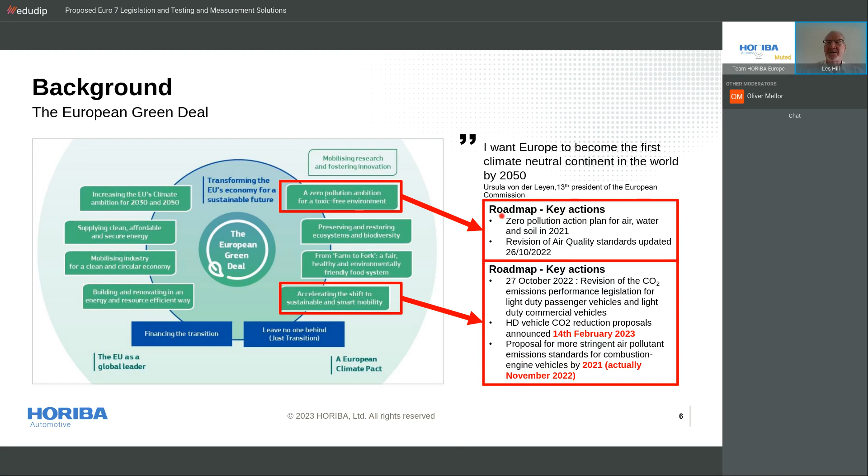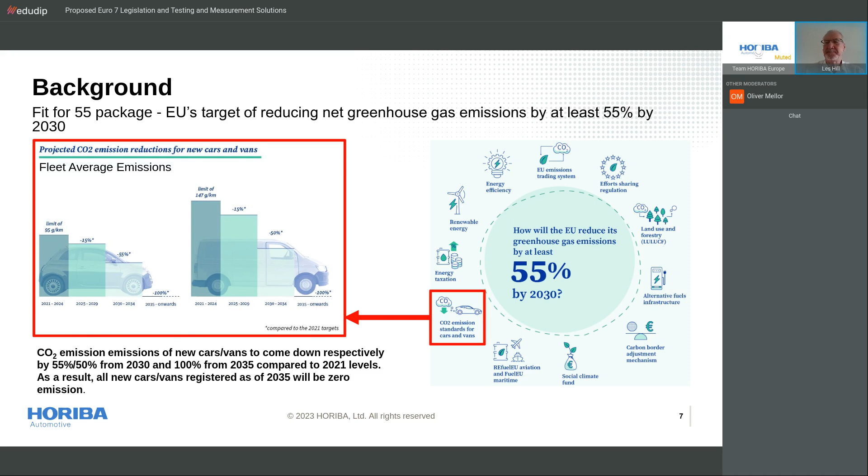The background: the Fit for 55 package will require that light-duty cars and vans must reduce their emissions by 55% and 50% respectively from 2030, and 100%, in other words, no combustion from 2035 in comparison to 2021 levels. That has now been approved by the EU Parliament on the 14th of February. It will now go to a final vote in plenary, and it will have to be endorsed by the Council. My understanding is that the vote from the Council, before it is published in the official journal, will take place on the 7th of March, but it is expected to go through.

These are the details of the heavy-duty CO2 reduction that was published in February. Basically, for heavy duty, all trucks above 5 tons, city buses and long distance buses above 7.5 tons, as well as trailers, have to meet a reduction of 45% against the 2019 levels by 1st of January 2030, 65% by 2035, and 90% from the 1st of January 2040 onwards.

New city buses will all have to be zero emissions as of 2030, but you can decide how you will meet that, because you could use electrification, hydrogen fuel cells, or hydrogen in internal combustion. There will be exemptions to the CO2 reduction targets for this list here of heavy-duty vehicles.

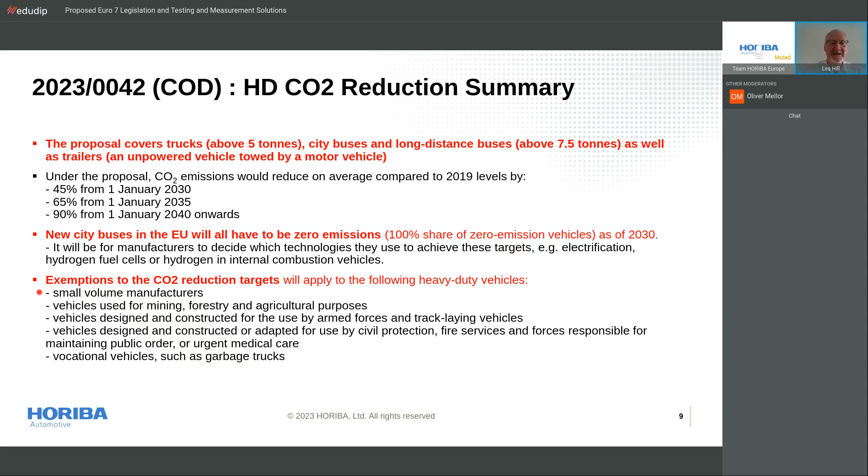Now, the Euro 7 standard is a bit of a revolution in terms of automotive regulation. For the first time, we have a coverall regulation that not only covers exhaust emissions and evaporative emissions, it also covers other areas of emissions in the car. So, for example, we now have limits for the emissions from brakes. They are proposing rules on the emissions from tires.

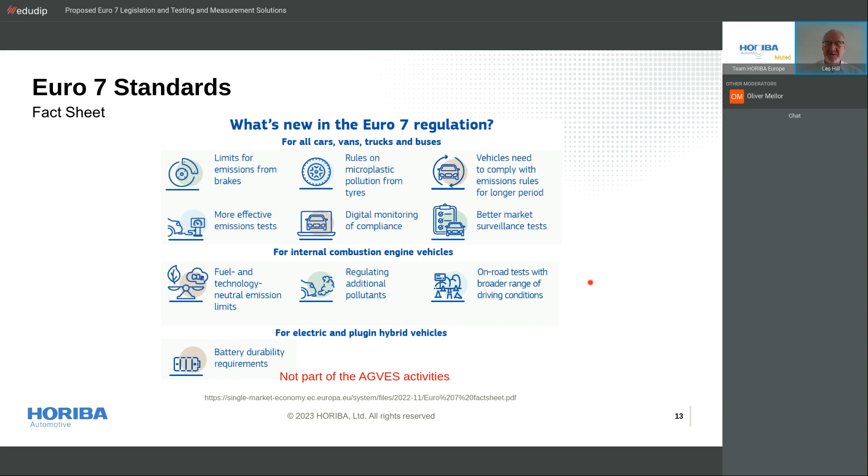And finally, Euro 7 also covers electric vehicles, specifying battery durability requirements, which was not part of the original AGVES, but was added to Euro 7 by the European Commission. The type of testing: as a result of the AGVES process, the favoured route for type approval will always be on-road testing. That is, you take your vehicle that you wish to be type approved and you drive it on the road. The portable emissions measurement system is mounted on.

And now the rules will cover almost all driving conditions in terms of dynamics, cold starts, warm starts, and a wider range of ambient temperatures and payloads. You are also expected to measure the new regulated pollutants if it's technically possible to do so.

Laboratory testing is still in the type approval, but this is mainly for using the WLTP for CO2, for the fleet-based CO2 emissions targets. However, if you're unable to measure the new regulated pollutants on board because you don't have the technology, you can do the testing in the laboratory. But that will be using some form of RDE test cycle, the form of which we're not exactly certain. Low temperature testing will be performed at -7 according to the requirements of GTR 15.

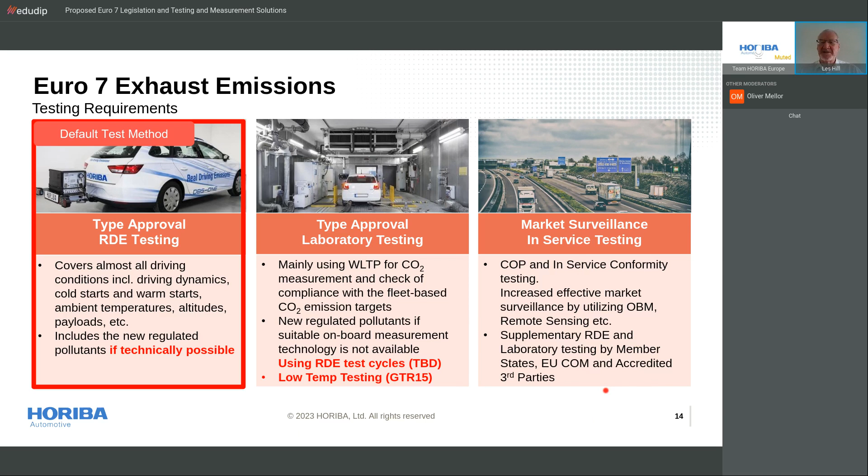And the third element that is really quite enlarged is the expansion of market surveillance and in-service testing. So conformity of production is already, of course, there, and in-service conformity testing is also included. But there'll be increased market surveillance by using the onboard monitoring, which I'll talk about later, and remote sensing. And also there's going to be a regime of supplementary RDE and laboratory testing by member states, the EU Commission itself, and accredited third parties.

The Euro 7 standards: there is basic Euro 7 if you meet the requirements, but there are also derivative standards. The 7+ means that you have a vehicle that's got lower emissions or a higher battery durability, and that goes for an electric vehicle as well.

A 7A means your vehicle is equipped with adaptive control functions, and the definition of adaptive control functions is given at the bottom. One of them could be, for example, that you have a system where your sat-nav will tell the driver to cruise or coast as he comes up to the next roundabout or junction, in which case the engine will shut off, and that will save pollution and will also save fuel. So that could be an adaptive control.

7G is defined for vehicles which have got an internal combustion engine with geofencing technologies that stops the engine operation if it's got a depleted battery in urban zones. And you can combine all of these different categories to give you a combination category of type approval for your vehicle.

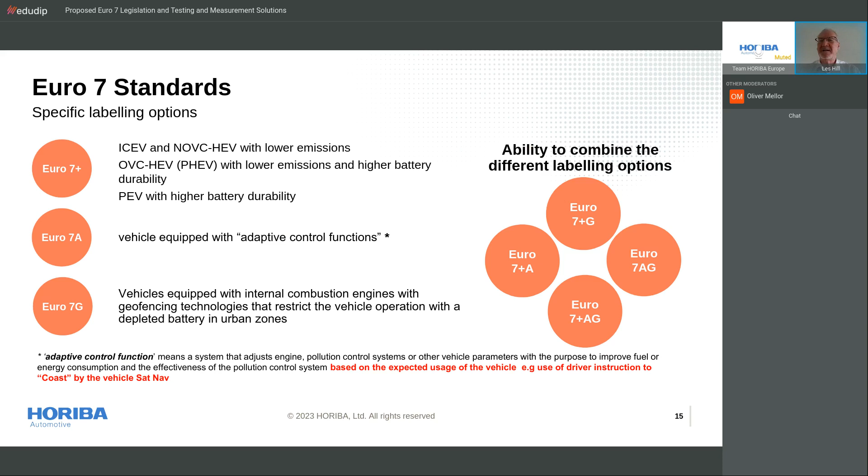This is the specification for what would be a Euro 7+. You have to declare, and of course, if you declare compliance, then it will be verified by in-service conformity or other means, that you have a 20% lower emission limit than those set out in Annex 1 for gaseous pollutants, and an order of magnitude reduction for particle number.

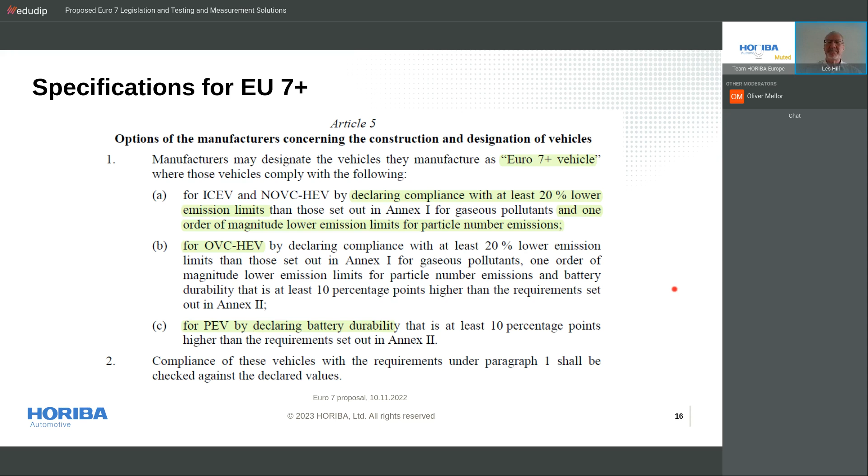For a plug-in hybrid, you have to have the 20%, and you also have at least 10 percentage points higher in terms of the durability of the battery than the standard. And for a pure electric vehicle, you have to declare a battery durability at least 10 percentage points above that of the standard.

The other big change in Euro 7 is the inclusion of onboard monitoring. Now, onboard diagnostics has been around for a long time, but the onboard diagnostic system does not fulfill the requirements of Euro 7. It may not give a full accuracy of what the emissions are or any malfunctions, and it doesn't force repairs.

But the intention is that onboard monitoring of the emissions of the vehicle will be used, and that will be logged by the vehicle, and it can be informed over the air to a central area. The EU Com has confirmed in the recent meetings that the onboard monitoring will include sensors for NOx, ammonia, and PM. Now, these sensors do not work from cold start, so they have to warm up before they become operational. So in that case, modeling or virtual sensors will be applied for these cold start periods.

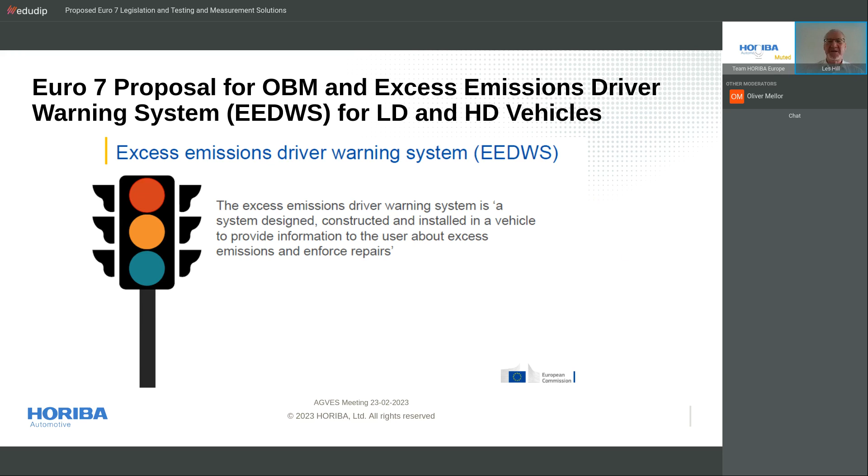One of the interesting applications, and by the way, just to say that all vehicles must have an effective proven onboard monitoring system before the 1st of July 2025, which is the introduction date for Euro 7 for light-duty vehicles. The OBM is going to be used to bring up the excess emissions driver warning system, EEDWS, it's a terrible acronym, for light duty and heavy duty. And this is a traffic light warning system that will give the driver information about his emission status. Effectively, it's a traffic light system.

If you have the green, and this display is shown to the driver when he starts the engine and when he stops the engine. That was the intention. So basically, if you're green, everything is okay. Emissions are all okay. Everything is normal. The monitoring is normal, which means this vehicle is available for testing for in-service conformity.

There's an amber setting, which is inconclusive monitoring. In other words, probably okay. Vehicle is not a high emitter, but the OBM monitoring for some reason is inconclusive. That could be because it was halfway through a regeneration. The trip wasn't long enough for the onboard monitors to make a decision on its operational status. So you'll get an indication of that to the driver.

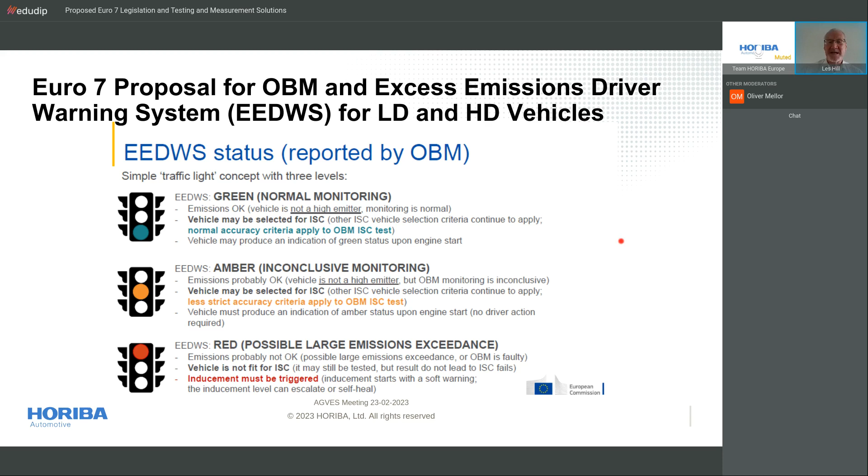And of course, the worst case is the red. And this is where the emissions are probably not okay, or the OBM is faulty, in which case the vehicle is not suitable for in-service conformity testing, and inducement must be triggered, which basically means telling the driver you have a problem. And there will then be stages of inducement, which would ultimately, in the worst case, mean the engine would not start. But that's all in discussion at the present time.

Here are the limits. These are the limits for the light-duty vehicles. And what you see here, everything in pink is new. This is new from Euro 6 Step E, which comes in September. And basically, they've harmonized the emissions at the EU 6 limits. Everything is at the lowest level for Euro 6. It's the same for gasoline and diesel. The same results apply for laboratory testing and on-road. There is no uncertainty factor for the PEMS.

The PEMS is assumed to be accurate within these limits. We have new emission species. We've got new ammonia as a mass in milligrams per kilometre, and particle number is now 10 nanometers, not the current 23 nanometers that are in Euro 6.

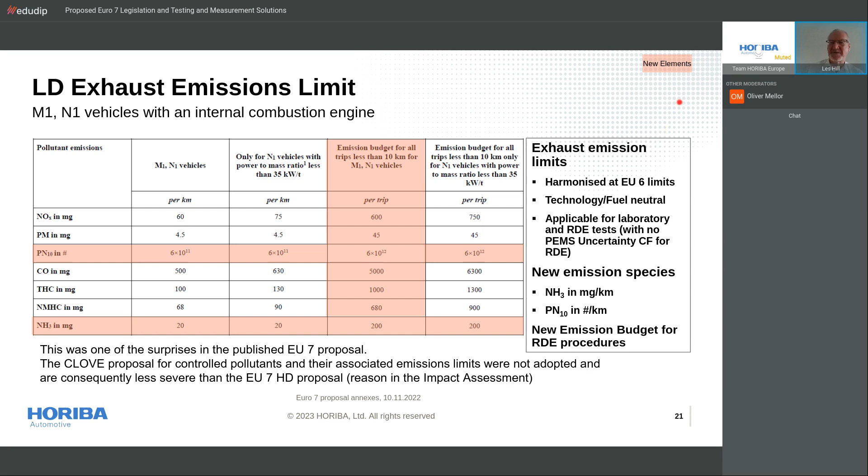Now, there was some surprise with these figures. They were not as low as what was proposed by the working group, the contracted CLOVE. However, if you read the impact assessment, the Commission decided not to impose lower limits in order to give the manufacturers enough time to engineer for the more stringent Euro 7 requirements. And that's explained in the impact assessment, which has been published.

Now, when it comes to the actual limits, you'll see that here there is this new column. It's called the emissions budget. And the emissions budget applies to all testing that is less than 10 kilometers. If you start a vehicle and you drive for less than 10 kilometers, then you're allowed to emit 600 milligrams of NOx. That goes for all components, by the way. This example just shows the NOx, which is 60 milligrams per kilometer. So for 10 kilometers, you have a budget, 600 milligrams of NOx.

Now, in order to be reasonable, the EU7 proposes that for the first 2 kilometers, you have a power restriction on the vehicle. So that's to stop people who start the engine, drive away at full throttle from a cold engine. You can't do that. That is an extended condition. So for that reason, they have this 2 kilometers of restricted power driving.

Now, how is that detected? Well, CLOVE proposes that the PEMS is connected to the onboard diagnostics, and that will be indicating what the power of the engine is, of the maximum wheel power from the vehicle. That will be indicated.

If it's a plug-in hybrid, then it's 2 kilometers after the first internal combustion engine start, not the vehicle start, because obviously a plug-in hybrid could start on electric. The emissions limit covers all conditions, normal and extended, which I will come to. But effectively, if you're in extended conditions, you divide the emissions by 1.6 to reduce it. But that's only for the parts of the test where a single parameter is in extended. There is discussion about what happens if there's more than one extended condition at the same time.

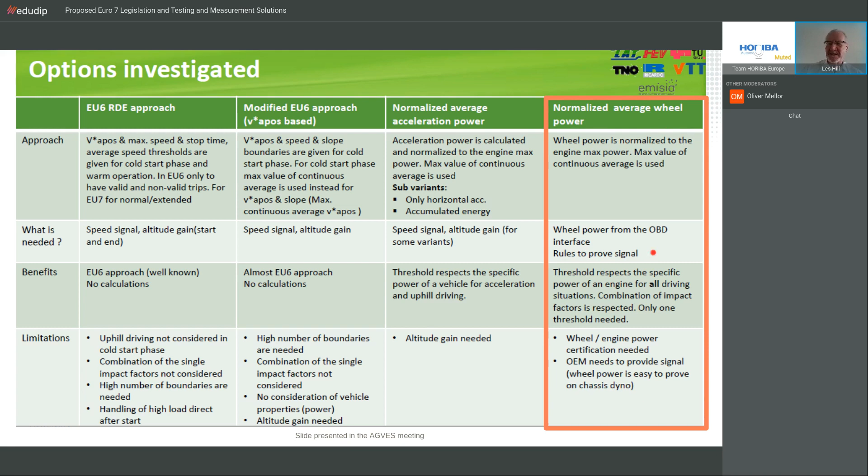So I just put this slide in. This was one of the slides from the CLOVE consortium, and it looked at the different options of how you could reduce the power for the first 2 kilometers, and they came up with the normalized average wheel power. And the explanation of why they preferred that method is given here.

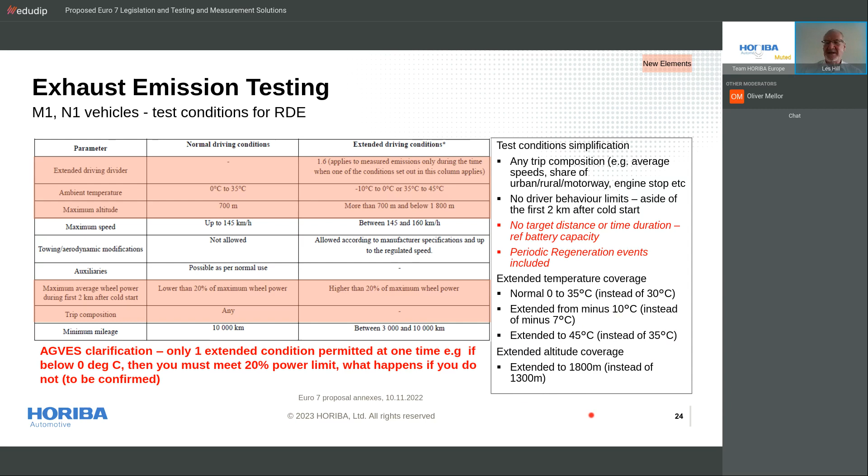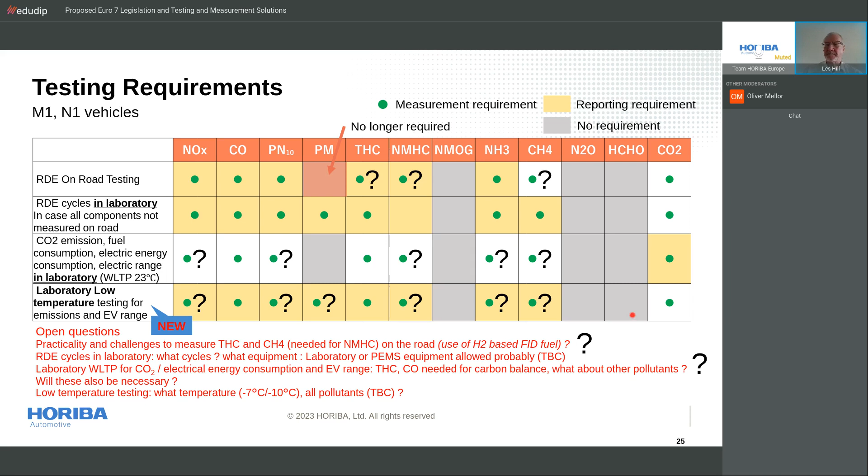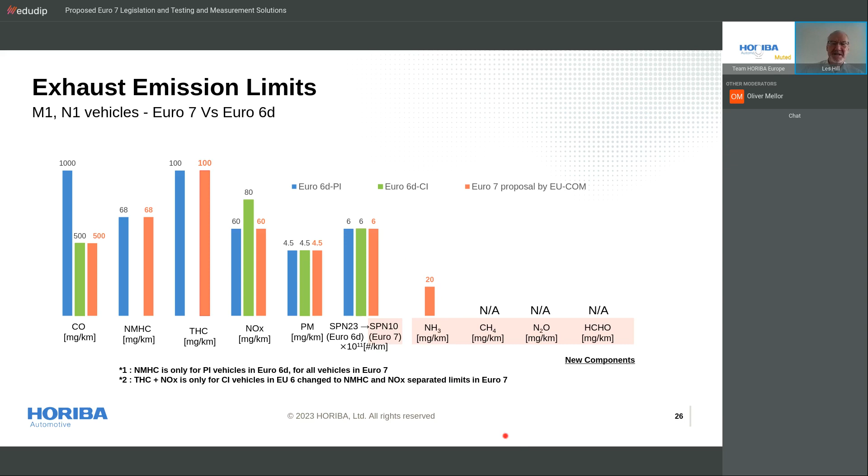Moving now to heavy duty vehicles and engines. So again, the predominant intention is that heavy duty vehicles are tested on the road.

Now, for heavy duty, it's a fairly complex scenario. The budget applies for 3 times the amount of work during a WHTC cycle. So typically, if the engine is 200 kilowatts, then for a WHTC amount of work, it would be 40 kilowatt hours. So for less than 3 times the WHTC, that's the budget. You cannot exceed the budget as given in the table.

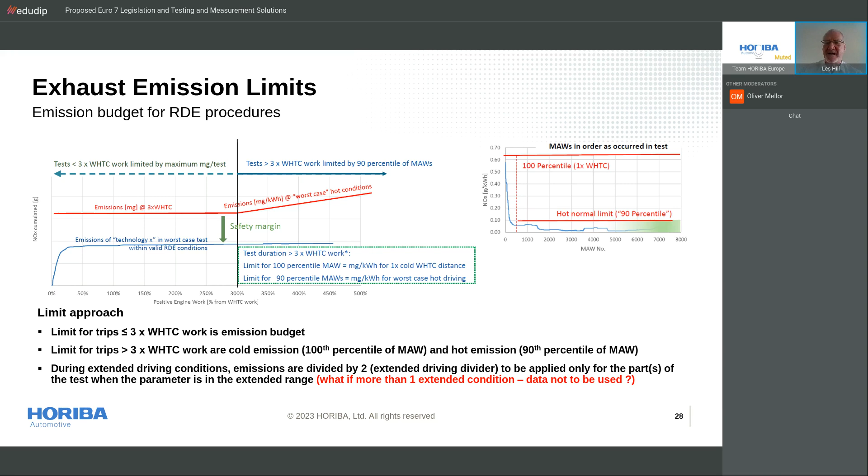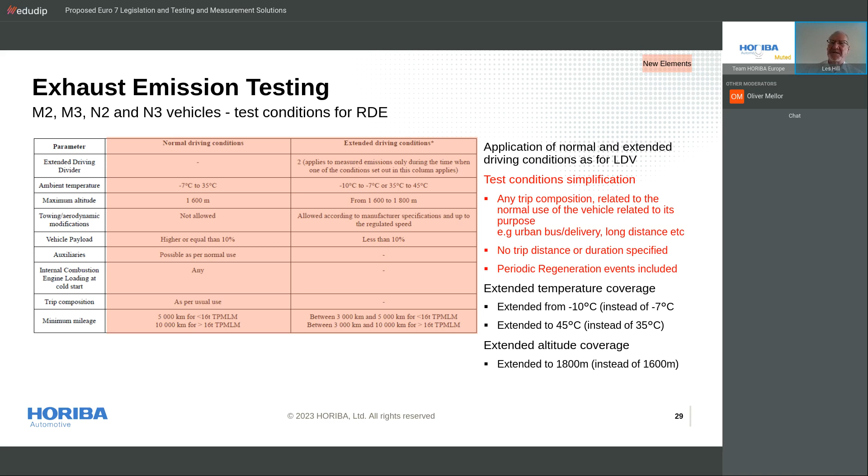No trip distance or duration has been specified. And again, periodic regeneration emissions are included. The temperature range extends from -10 up to 45 degrees for the extended range. And the altitude extended condition now is 1,800 meters, which is obviously an increase over Euro 6. So again, very wide open conditions on how the heavy duty vehicle is tested on the road.

When you're testing your engine, all fuels that are applicable to the engine must be tested. So diesel, CNG, hydrogen. Hydrogen will be included in Euro 7 because hydrogen internal combustion is currently going through UNR 49 at the present time. It was presented at GRPE in January this year.

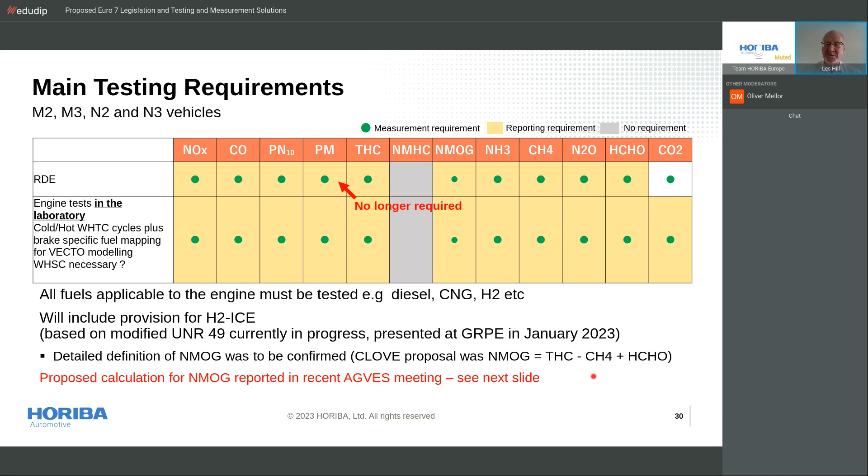NMOG is the parameter for hydrocarbons, and in this case, the proposed calculation for NMOG was confirmed or proposed in the last AGVES meeting, and the proposal is that you can determine NMOG using total hydrocarbons, methane, and formaldehyde. Now, the calculation originally for NMOG comes from USA EPA CFR 1066, but it's a much more complex procedure because it involves the measurement of ethanol and the measurement of 13 oxygenated hydrocarbons, which is quite complex. And there's no analyzer that does it. It has to be done with chemical measurement.

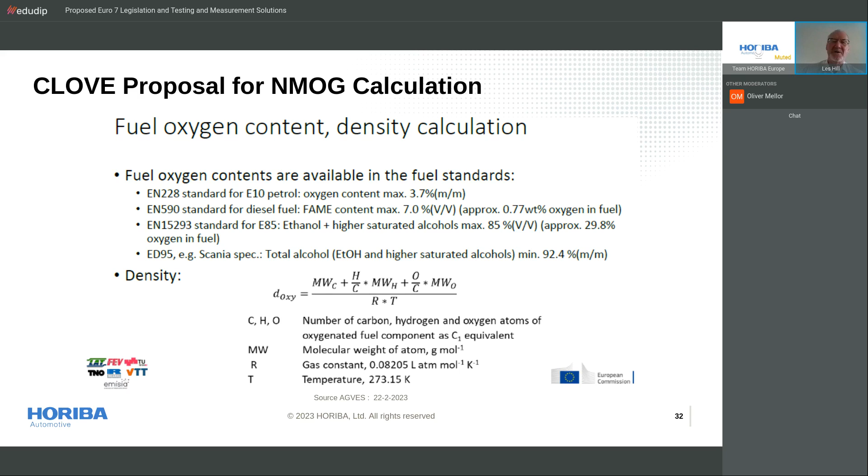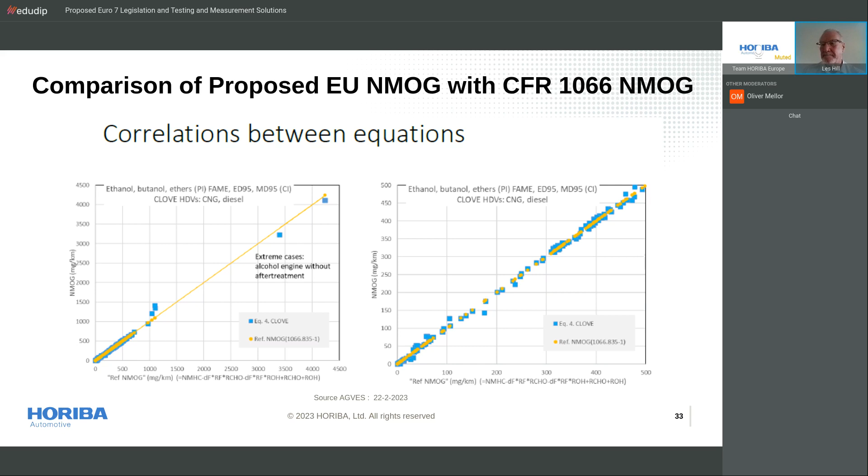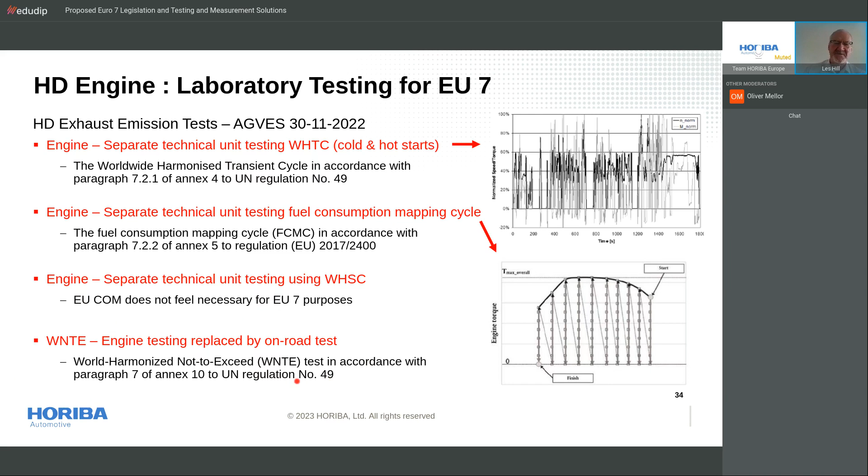Now, currently, for Euro 6 heavy duty, you have to perform a world harmonised stationary cycle. The EU Commission did not propose this, as it's not necessary. And also the world harmonised not-to-exceed test, which is part of Regulation 49, they're saying effectively can be replaced by the on-road testing.

The EU Commission accepted there are special conditions for small and ultra small vehicle OEMs. So basically they should get some kind of derogation from Euro 7. So a small volume manufacturer is someone who produces less than 10,000 M1 vehicles or 22,000 N1s, and is not part of these excluding conditions like being part of a group of connected manufacturers or a bigger manufacturer. Producing less than 1,000 new vehicles of M1 or N1 would give you ultra small manufacturer classification.

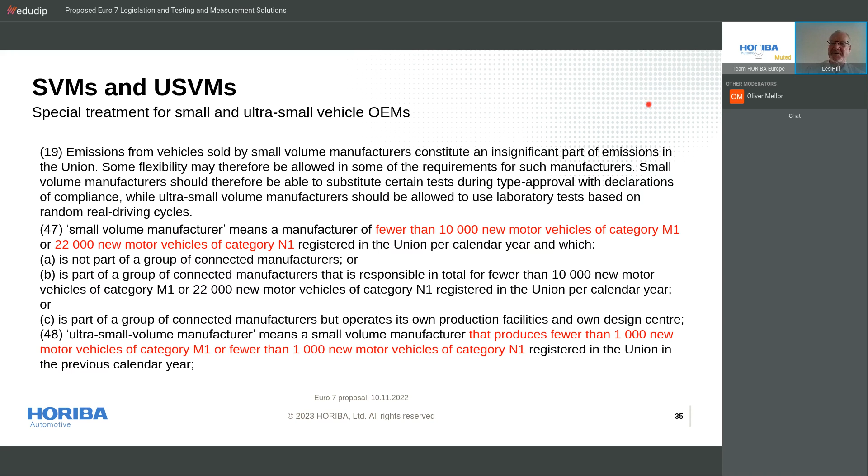These are the rules for small volume. Basically, you can set out declarations of conformity. If you're a small volume manufacturer, you can simply say, we declare we meet, but the compliance will be tested by in-service conformity and market surveillance. So it's not safe to simply declare without knowing that you can meet.

Ultra small shall comply with the limits set out in the annex in laboratory tests based on random real driving cycles for in-service conformity and market surveillance. So in other words, the word random was used here, and random was a qualification that is still under discussion. Did it mean random? Does it mean simulated? Or can it mean replication of an actual RDE trip that would be performed on that vehicle? So that is still to be discussed at the moment.

There's also special rules if you are producing multi-stage vehicles. These are vehicles which are produced using a standard powertrain and chassis from another OEM. And for multi-stage vehicles, anybody who manufactures the final vehicle is responsible for the emissions type approval if they make any modifications to the vehicle beyond the data provided by the manufacturers of weight, frontal area, and all sorts of these kinds of characteristics. If you stayed within them, then the responsibility for the emissions stays with the manufacturer of the previous stage, such as the chassis and the engine.

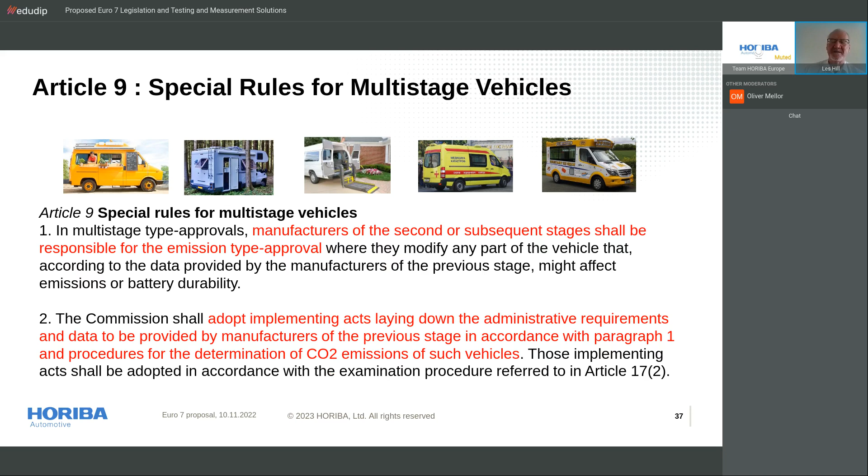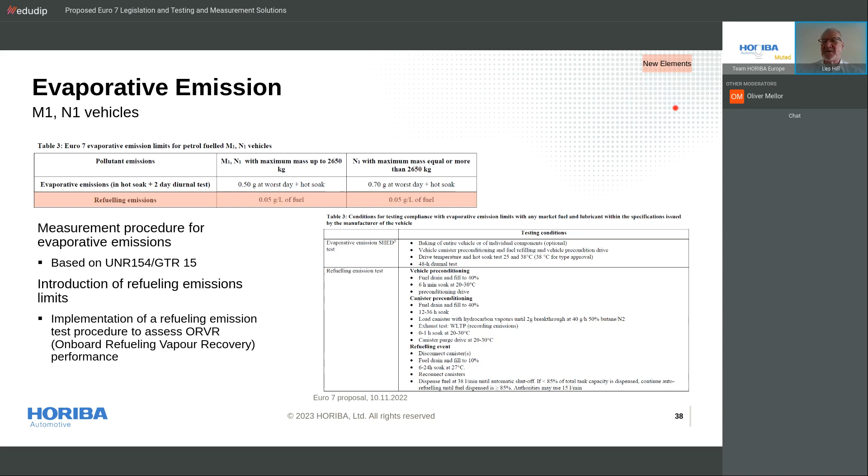The Commission will insist that the information is given so that the criteria and the parameters will be given to the subsequent stage of multi-stage vehicles so they can stay within that, which means the original engine OEM is responsible for the emissions. As well as exhaust emissions and the other changes in Euro 7, you've also now got a more stringent evaporative emissions test, which now includes, for the first time, following the USA and China, onboard refueling vapor recovery, which will also be tested in the evaporative emissions.

There are now proposed limits for particles from brakes, dust from brakes. Currently, there are obviously placeholders here, but the first values which have been put in are that up to the end of 2034, you should not emit more than 7 milligrams per kilometer of PM10. Other parameters are still yet to be established. And from 2035, that would be reduced to 3 milligrams per kilometer of PM10.

The test method is based on the UN GTR draft method. Now, in this case, when you look at the draft method, it's more than PM10 and PN. It actually includes PM10, PM2.5, PN of 10 nanometers, and total particle number. So even though Euro 7 requires these as limits, they're expecting to see all the measured parameters when the brakes are tested. And this is just the background now of the work through of the document.

One of the issues is who is responsible for the type approval of the brakes. Is it the vehicle manufacturer or is it the brake OEM? And what happens if it's a mix, that someone provides the disc and somebody else provides the brakes? Who would be responsible for type approval? The latest comment I heard is that, to simplify it, it's probably going to be the vehicle OEM who's responsible. But then again, that is just a comment. It would need to be confirmed.

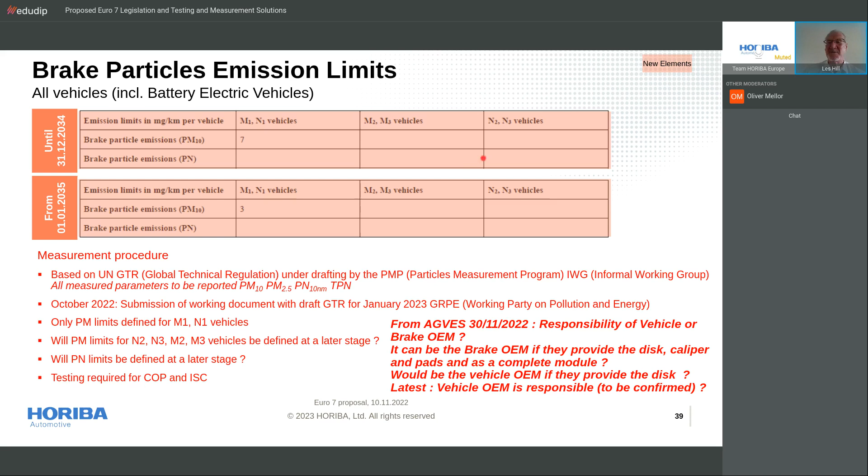And the question is, there isn't actually a method at the moment. There is a new UNECE task force that is looking into this for tyre abrasion at the present time. So when that comes in, then the method will be included in the implementing acts. So they're saying AGVES concluded that it's the responsibility of the tyre OEM to perform this type approval. And so tyres must be tested. And of course, if you've got a Euro 7 type approved vehicle, then your tyres would have to remain Euro 7 compliant.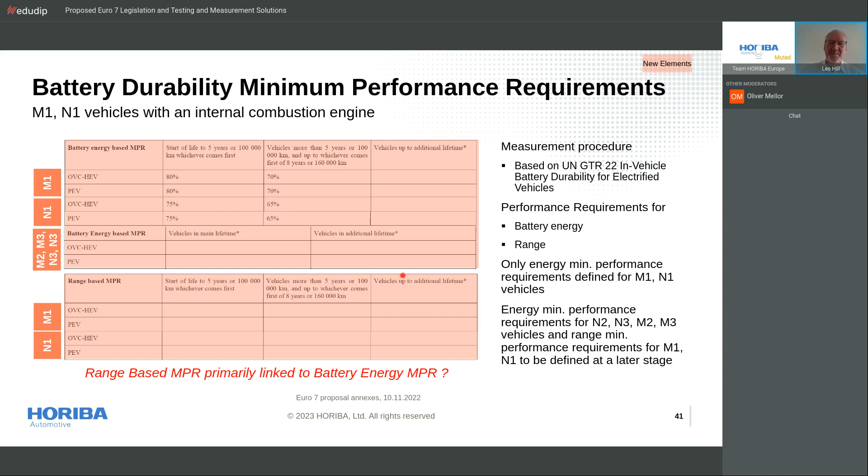Now, it says here there's two categories. One is the energy-based minimum performance, and the other is the range. From my understanding, they are linked together. Obviously, the range does depend on the battery. The test method is already basically confirmed in UN GTR 22. And so that will be adopted and modified as necessary for the purposes of Euro 7.

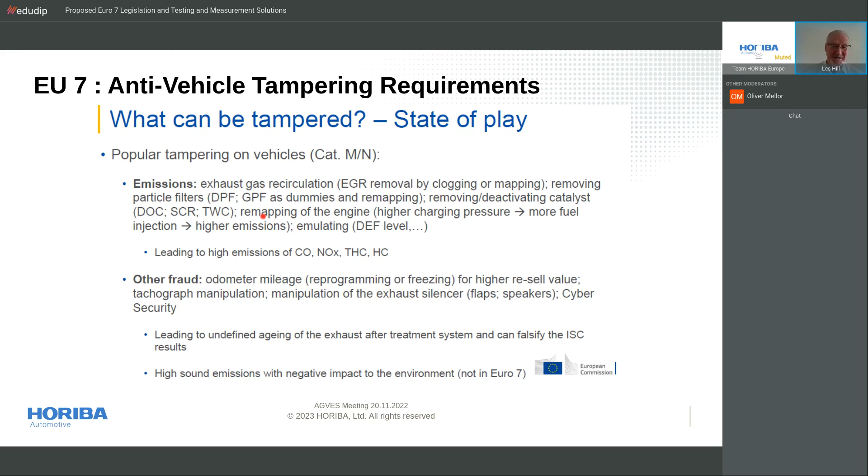Tampering. Now, obviously, when we have emissions control systems, we all know that there are places where they can be tampered and modified. Heavy duty, having the SCR removed. We have remapping of the vehicle, which can also increase the emissions. And there will be rules within Euro 7 and tests to make sure that that doesn't happen. Under Euro 7, it will not be allowed in any form, and it will be detectable if someone has tampered with the vehicle. All of that will be included within Euro 7.

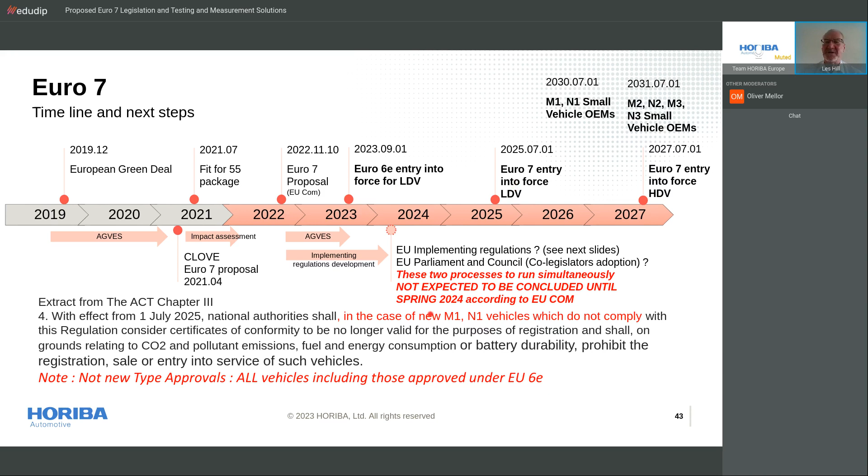And they're not expected to be concluded fully until spring of 2024, according to the EU Commission report to the EU Parliament. And the other thing to remember is that it's not new type approvals from 2025, from 1st of July. It's all vehicles, including existing ones which were approved under Euro 6E.

So the work on the implementing regulations has begun. And in the first meeting, the EU Commission's opening statement is that AGVES is not here to decide the content of EU 7 and its timing. It is only here to work out how it can be met. The Act and the annexes can only be modified by the EU Parliament and the Council of Ministers.

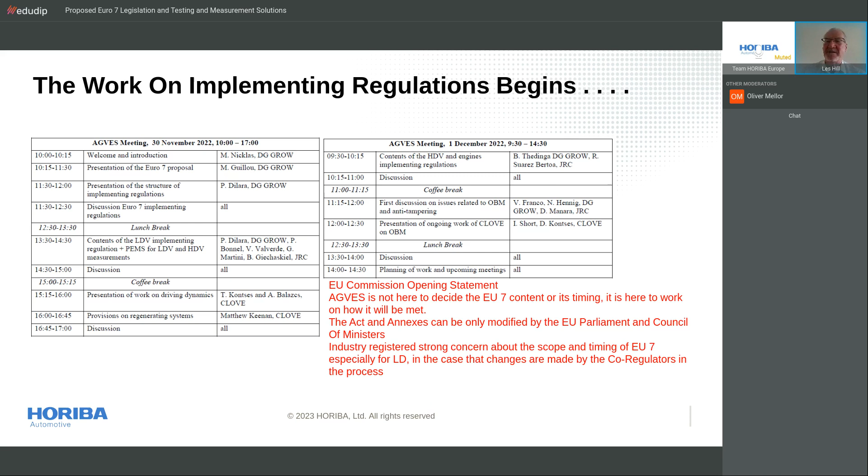And of course, this caused a comment from industry saying we may effectively be implementing acts on a moving target, and that is of some concern to the industry, given the short time period before EU 7 becomes applicable for light duty.

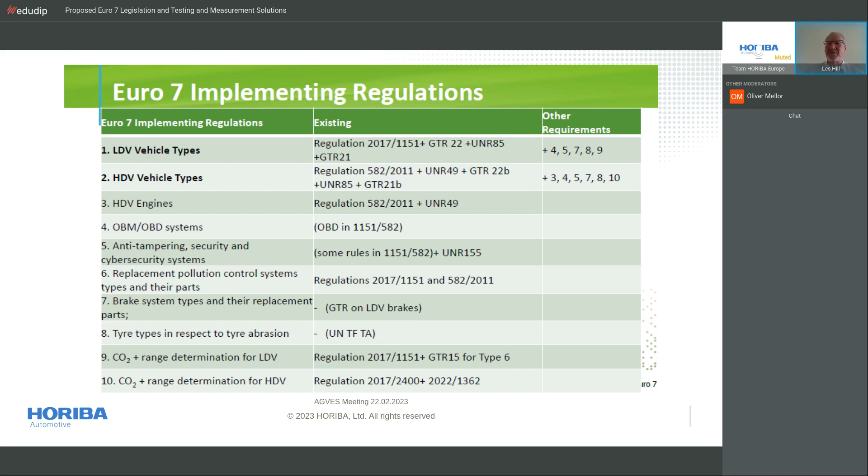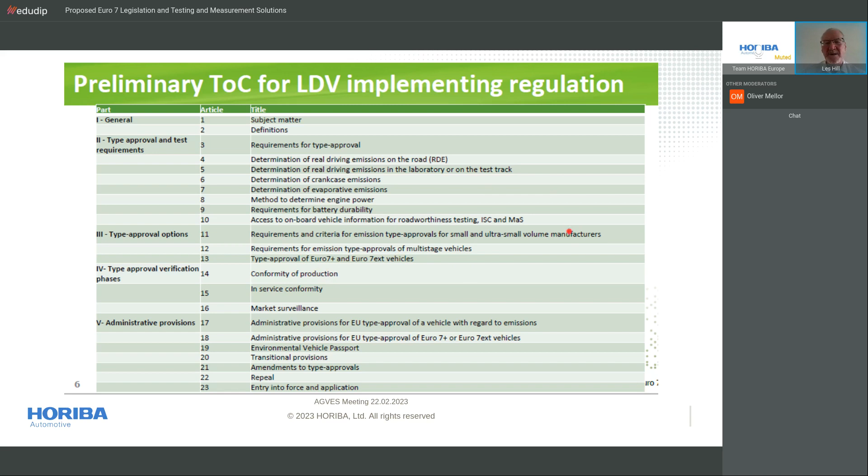This is the table of contents for the implementing regulations that need to be defined. And these are lists that they follow. This is only a tentative list. They think they've covered everything, but there may be changes in this as the implementing regulation evolves. There may be additions to this or maybe even reductions from this.

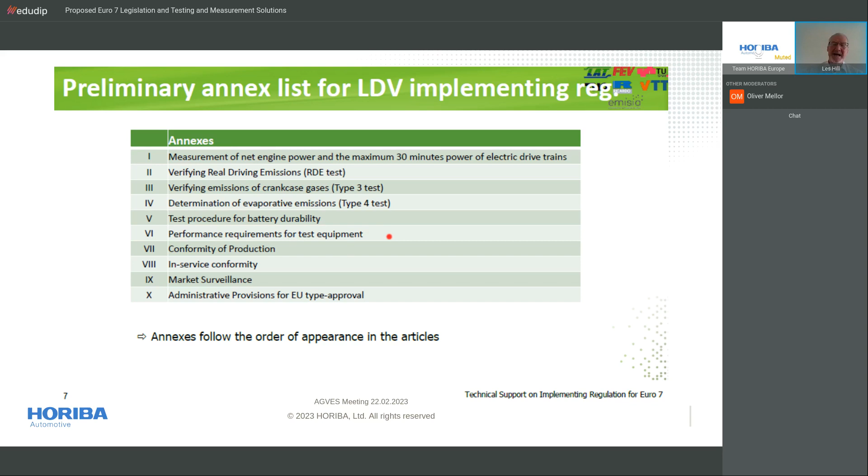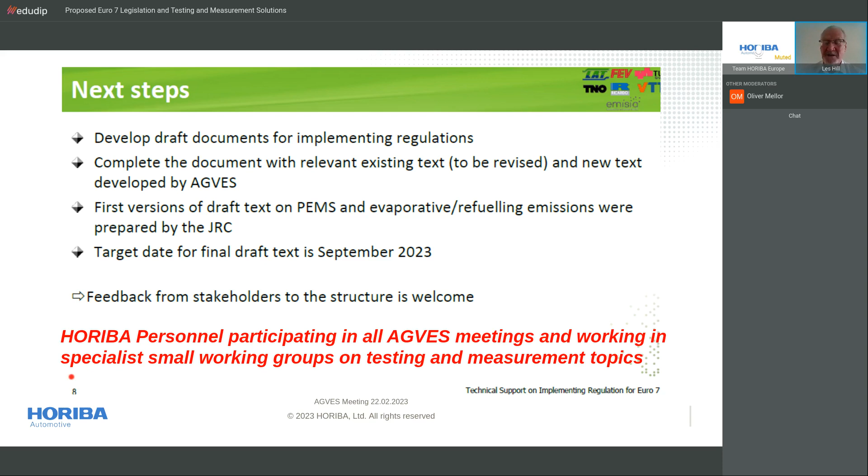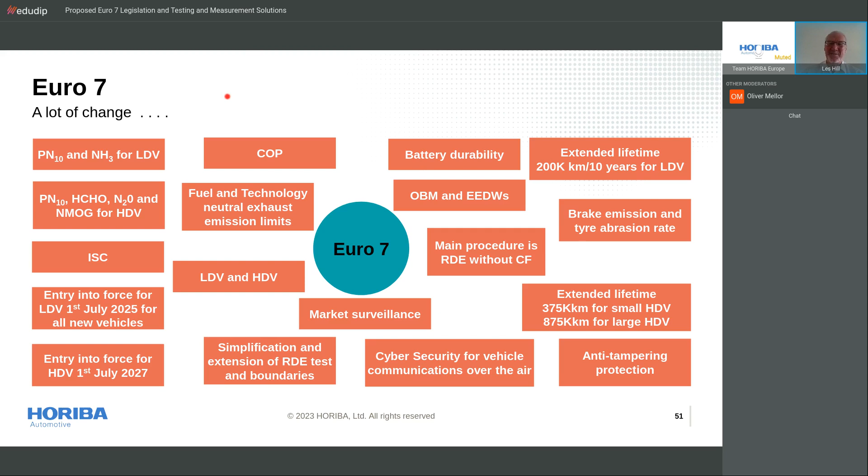So to summarize, a lot of change for Euro 7, a lot of issues. It's a challenge for the legislators to complete this, and it's certainly a challenge for the manufacturers. So there's a lot of change that will come with Euro 7. And I believe we now go to a survey.

So which part of Euro 7 will be the toughest to meet? So please, if you could put your votes in for this, and we can have a look at the results. Thank you.

So we have quite a wide variation there. EU 7 light duty compliance date seems to be the most predominant issue of concern at the present time. Thank you for that.

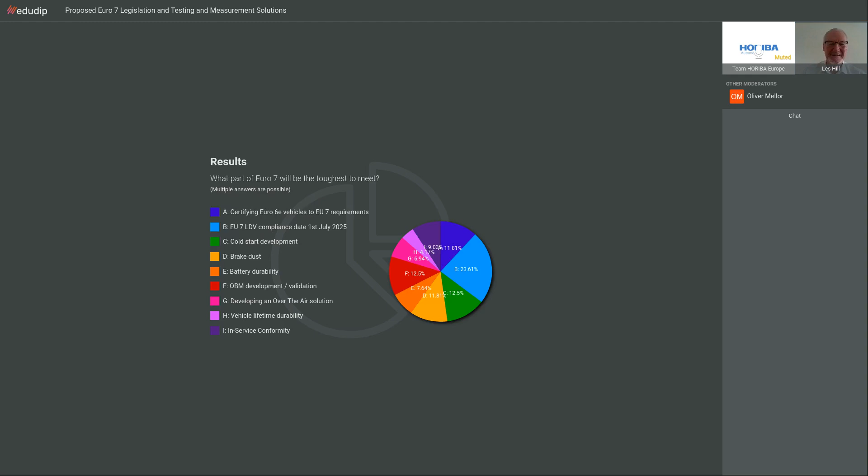So, thank you for those results. They'll be very interesting. We're going to go quickly to testing and measurement solutions. And I must stress, this is really brief. Because of the limited time, we wanted to make sure you understood the status and process of the Euro 7 legislation. We want to use some time to look at the testing and measurement solution. So this is very brief.

First of all, one of the changes is PN10, or solid particle 10 nanometers, and we already have the instrument in the laboratory which will do this, which is the MEXA 2x10 SPCS. This is following the description of the modified method, which is in this document at the bottom. Basically, we've changed from the evaporated tube that was used to a hot catalytic stripper. And we've also changed the CPC, and now the CPC is no longer optimized to measuring 23 nanometers. It is optimized to measuring 50% cut point at 10 nanometers.

This instrument is available in two versions. You can get it for CVS diluted exhaust and also for measuring tailpipe raw exhaust. And existing SPCS systems for 23 nanometers can be upgraded for the new 10 nanometer standard. Now, this would be for 10 nanometers. If you still want to have some data about 23 nanometers, then you can put an optional second CPC optimized for 23 nanometers onto the new SPCS.

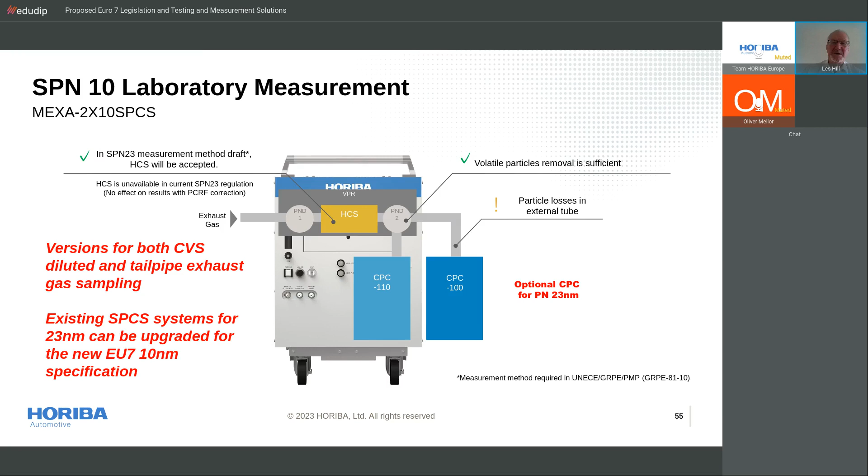Now, it's very similar to the existing OBS1 unit, but it has been considerably modified internally in order to reduce the amount of losses, because 10 nanometer particles are lost much more easily than 23 nanometers. So that's been reworked, but it's similar in the way it's designed, the system configurations and the user interface. We have a variety of pre-described optional lines that you can use to allow you to install it where you need to. And we've added an automatic zero check function, which is going to be part of the new regulations, for which we have a patent currently pending.

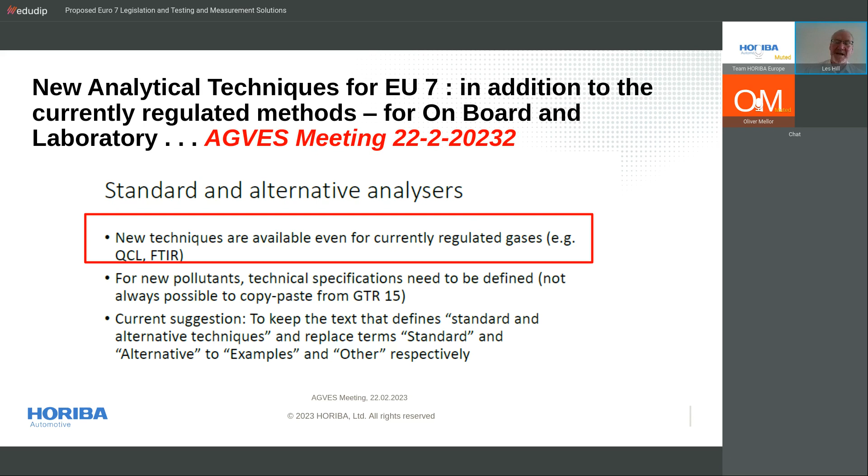Now, one of the interesting points from the last AGVES meeting was the attitude towards new analyzing techniques. Two new analyzing techniques have been recognized as having potential for Euro 7. One is the quantum cascade laser, and the other is the Fourier transform infrared. Basically, these are already defined for measurement of certain components like nitrous oxide and ammonia. But in the meeting, it was suggested that these analyzers are also able to measure currently regulated gases like CO, CO2 and NOx. So they're going to look at the text that would allow these analyzers to be used not only for the new regulated pollutants, but also the existing ones.

So here is an FTX. We have 3 models of the new FTX1. This one is literally just an FTIR for use with raw gas. Then we have the same device, but fitted with the RS model. And the RS model can incorporate THC with a FID and oxygen by magneto-pneumatic. And finally, we have a new version that could be used on CVS. This will measure continuous dilute and also bag as well. And that may be appropriate for some people who do want to continue to use the CVS system.

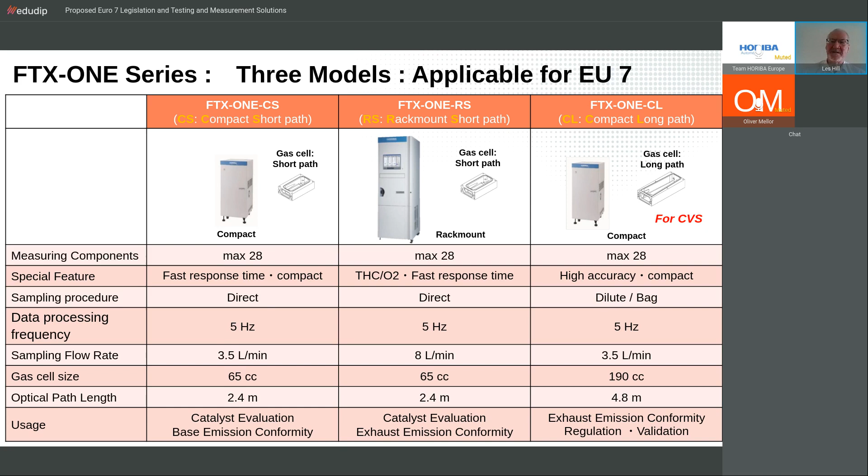We also have our QCL-IR technology. Now, I've put this schematic in for people who may not be familiar with the use of mid-infrared. So you've got the NDIR, which has been around now for almost 70 years, which is the conventional infrared, where you have a light source, what we call a wide emission spectrum source, and the selectivity comes from the optical filter and the filling of the gas detector. Typically that analyzer will measure one component, although it can measure more with certain designs.

FTIR takes an infrared light source and then from the interferometer creates a sweep of infrared wavelengths, which goes through the test cell into the detector. And then it gives you an absorbance spectrum over the range of the wave, from which we can calculate a large number of gases from a single measurement on the FTIR, and that gives you multiple gases.

QCL-IR is using very precise wavelength emitting, mid-infrared wavelength lasers. And for this, typically, you may have one laser for each gas, and these are fired sequentially, so that one fires and a measurement is taken, then the next, and it's done very, very rapidly. And so for each laser, you'll get a peak of measurement. So typically one gas per QCL.

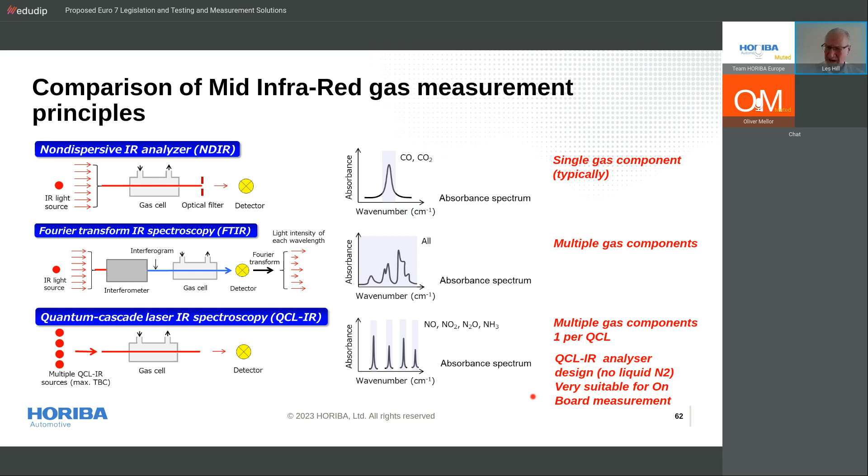But the beauty about the QCL is the fact its design is very suitable for onboard. There's no moving parts like moving mirrors. There's no liquid nitrogen. It's very robust. It's very compact. So it makes it very suitable for onboard measurement.

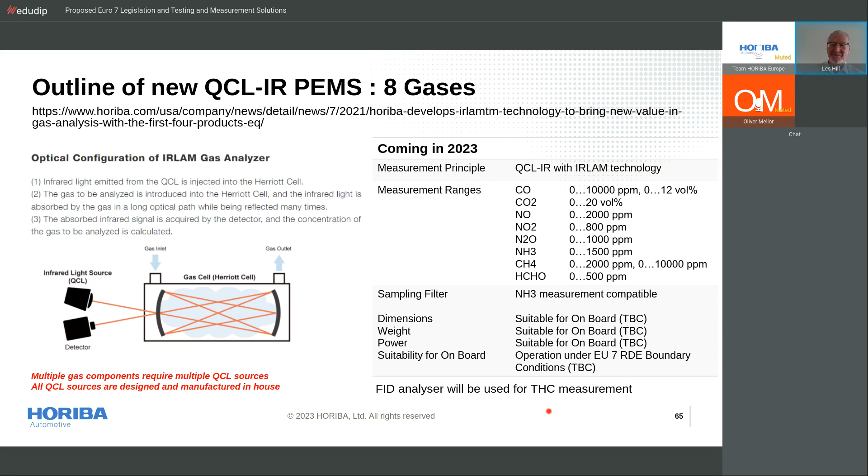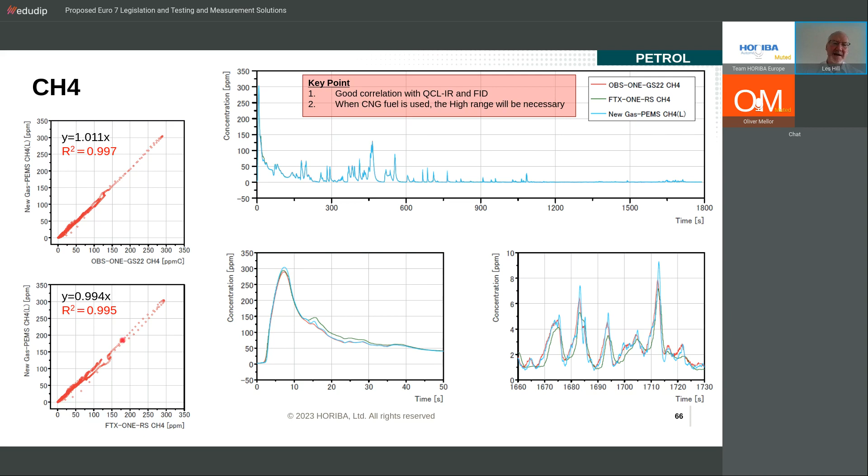For full work, you will still need a FID analyzer because we still need total hydrocarbons, and the only way we can do it with sufficient accuracy at the moment is by using an FID. This is just some graphs showing you the performance when we've compared the QCL-IR with other analyzers like a FID and against FTIR. You can see we've got very good correlation, and we also have confirmation that a high range will be necessary if you're running on CNG fuel. But you can see the linearity is very good in comparison with the existing techniques.

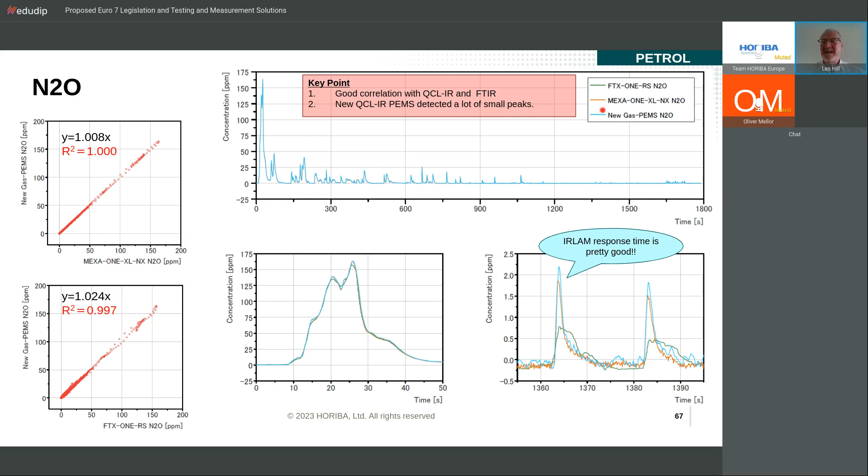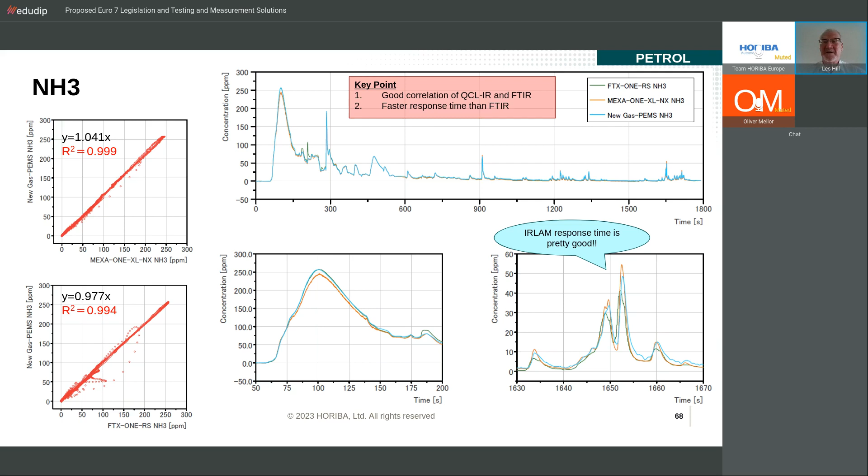Similarly with nitrous oxide, very good correlation, and we have a better sensitivity with the QCL method. It's much more stable and more sensitive, and gets a very good response. Ammonia is a very difficult gas. Anybody who works with ammonia knows it's really not easy. It is very susceptible to the sampling system, but we have, again, very good correlation. And although ammonia is a very sticky gas prone to slow response, the response is faster, which is very good and bodes well for its application in the future.

Now, a very quick look at a possible light-duty cell. In our opinion, the CVS remains the gold standard for accuracy and repeatability. It still is the best method, and certainly will be the method that gives the most accuracy for CO2 and fuel consumption measurements in the future. So here typically is what you might have looking at the present. You'll have an ammonia analyzer, probably measuring from raw exhaust. You may need some form of exhaust flow meter.

Now, we're showing here an ultrasonic flow meter, but how you measure the exhaust flow rate could be a variety of methods. You could use the exhaust flow meter from the PEMS. You may be able to use other techniques like subtraction techniques where you have the CVS flow rate and the dilution air flow, and the difference between the two is the exhaust flow. Maybe even taking the exhaust flow from the ECU. All of this is still yet to be discussed in the testing methods.

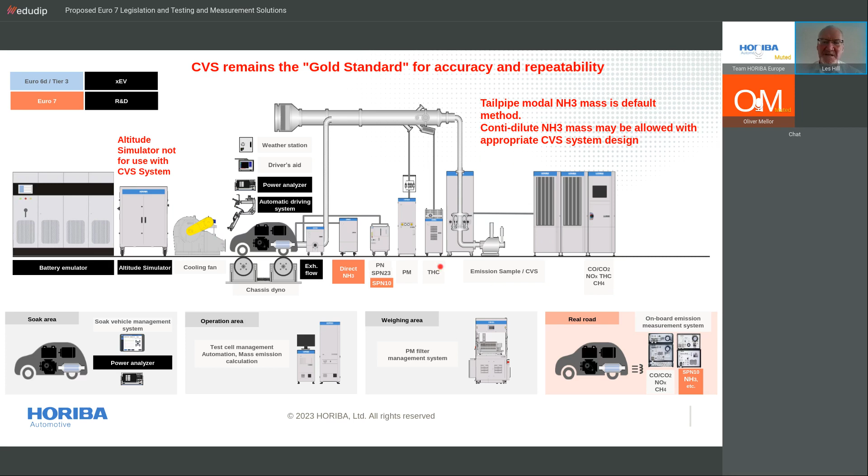So in the future, we're not sure about this. It is under discussion at the moment, but continuous dilute ammonia mass might be allowed, but the CVS would have to be specified to allow that to happen and to be applicable.

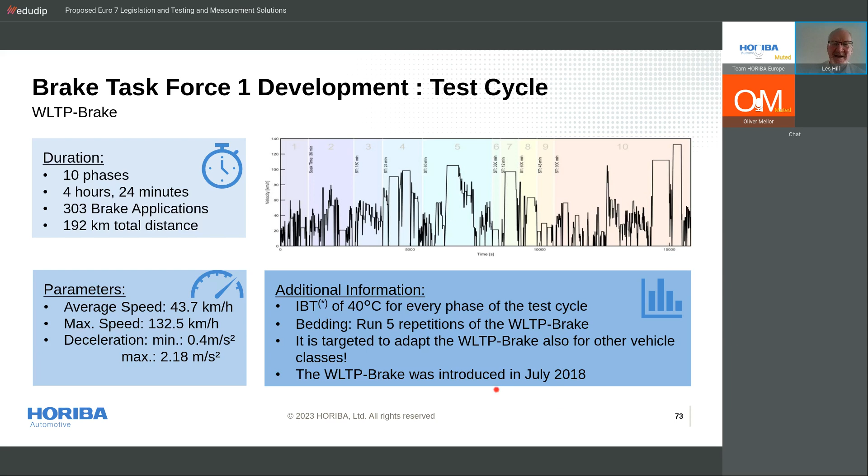Now, brake dust. Brake dust is now included in Euro 7. Here is the test cycle. This is a test cycle that the brake must be a simulated road trip. It's modified from the WLTC cycle, and this is the formation. So the brake dynamometer will rotate the brake disc and apply these forces as indicated by this test cycle. I'm not going to go through the details of it.

This is the equipment that applies that cycle. So this is our brake tester modified for brake dust. Here is the brake dynamometer connected to the brake disc. The brake disc is encapsulated with an enclosure, and we have HEPA filtered air, which is brought through, comes around and goes in through the brake enclosure, which is obviously rotating. Any emissions during the test is then captured and transferred into a sampling system.

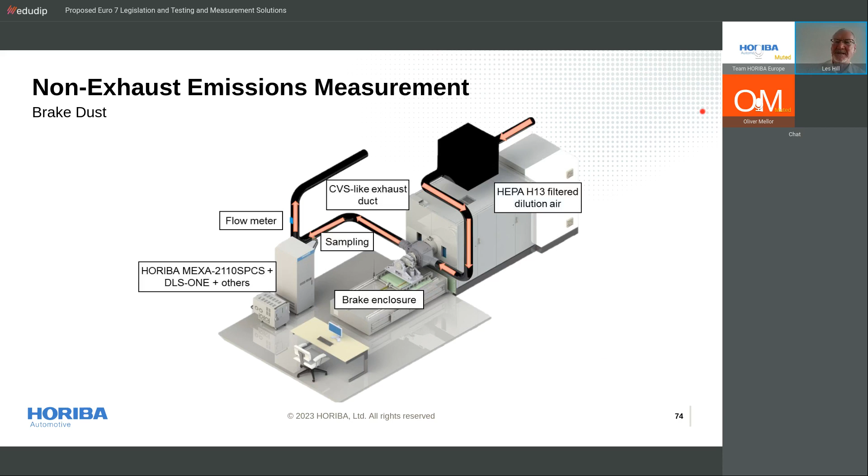And there's a variety of equipment here that measures PM mass and also measures different particle numbers as well. And then you have a flow meter. So by measuring the mass emissions and the PN emissions, you can then measure this from a single brake disc, which can then be multiplied up into 2 or 4 brake discs. Now, one of the issues, of course, is front brakes tend to emit more particles because of braking effort than rear discs, but that's going to be covered in the regulation to calculate the brake emissions from the entire vehicle.

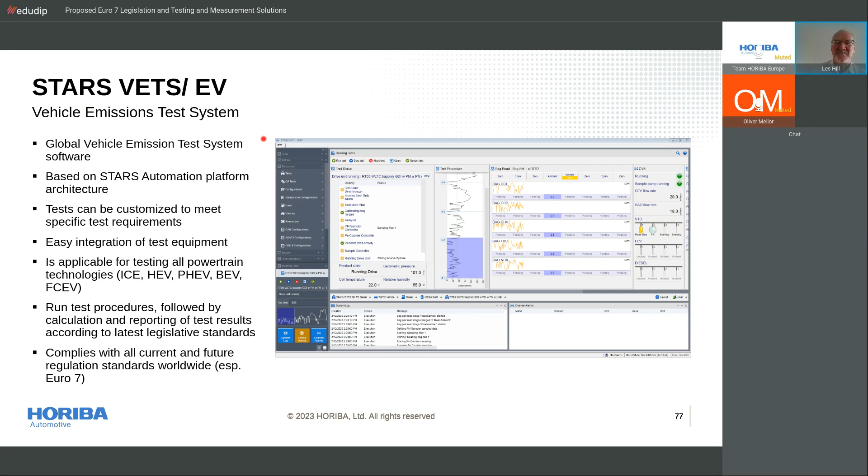So what we have then is the hardware and software for Euro 7. We have a combination of the test equipment down here and the automation system. So very briefly, I'm just going to go through a quick summary of our test automation. In HORIBA, we have a platform called STARS, and STARS is the basis of the majority of our test automation systems. So we have different flavors. So for example, this is STARS for vehicle emissions testing and STARS for electric vehicle testing. We also have a base version that does engine testing.

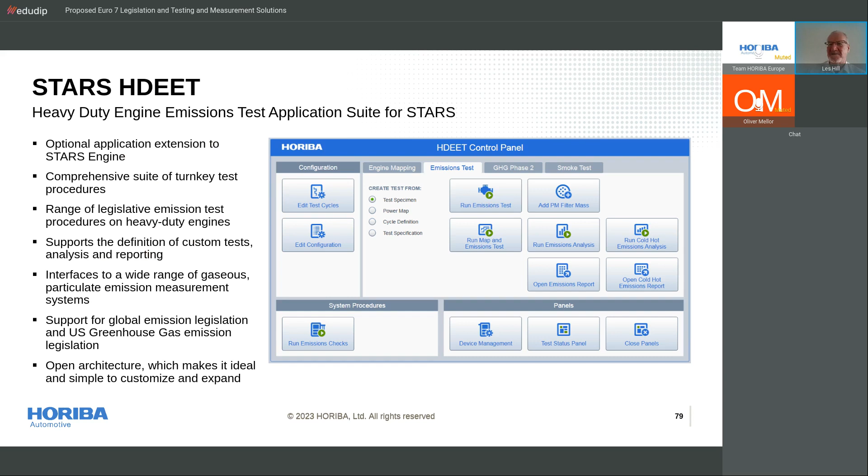We have a version that takes the engine test and adds on a package for heavy-duty engine exhaust emissions testing, what's called the HDEET, which covers all of these certification test cycles and the R&D for gaseous and particles and everything else. Also, obviously, you've seen the brake tester. So we have a STARS that controls the brake testing system, not only measuring dust, but measuring all these other parameters associated with brake development and brake testing, like noise, vibration and harshness, durability, etc. So that is the test automation system for brake testing.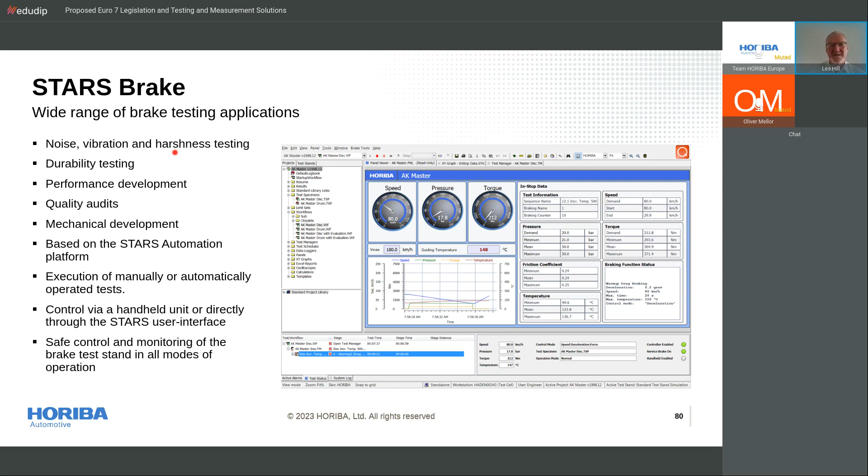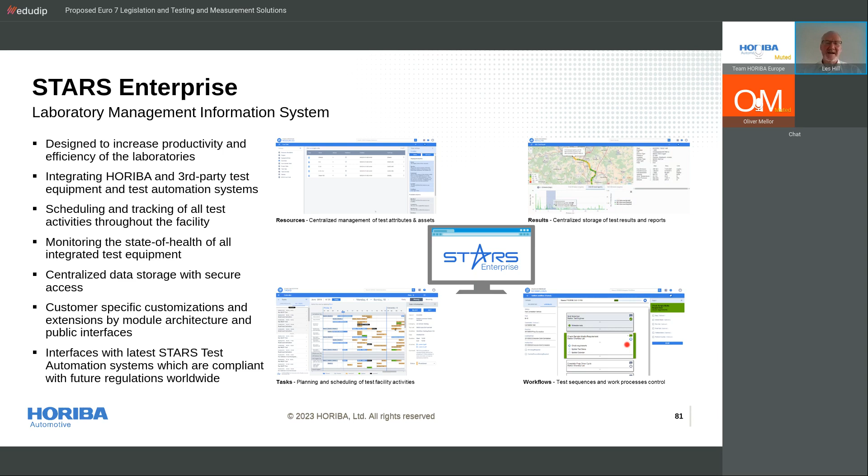Sitting above all of the STARS in the test cell is the STARS Enterprise system. And the STARS Enterprise system is effectively laboratory management of information. So it includes a central storage of all the results. It includes scheduling functions for each of the test cells. You're also able to configure tests and test sequences at the STARS Enterprise level that can be then downloaded into the test cell level. And finally, a new introduction is what we call the Insight.

The Insight is a functional application that sits between the emissions measurement equipment and the STARS Enterprise. And this gives you live monitoring of what is happening within the equipment, monitoring the quality data, such as all of the verification like linearization and NOx efficiency test. And it also actively manages what's going on here. So you can use this for setting your scheduled maintenance and all of the support functions that are normally really desirable for emissions test equipment.

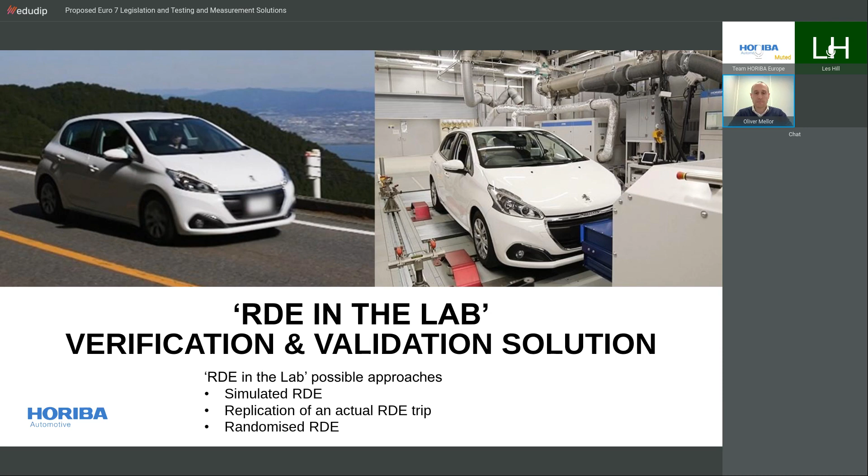So let's give some context. The current situation in RDE testing, I should say, is a very narrowly defined set of buckets, if you like. It's sometimes quite difficult to complete the tests, but when a test is completed, it's not necessary that the vehicle has passed or not. But in that situation, the testing is relatively difficult to do, but the engineering and the design of the after-treatment system, the calibration, is bounded, is constrained. So in effect, it's guided in terms of how to design a vehicle to achieve Euro 6.

It's not to say that it's easy, but in the future, we're moving to this scenario where, as Les mentioned, any trip composition is valid. So that's great for testing. That means that any type of road test is effectively able to be completed successfully. But the downside is that means anywhere within the regulatory box, within the design space, could be tested either by third parties or regulators, etc. So that presents a big problem for our customers. How do they cover that entire range effectively, efficiently, and without having too many more resources and test facilities, etc. So that's the challenge that we're proposing we solve with some of these tools.

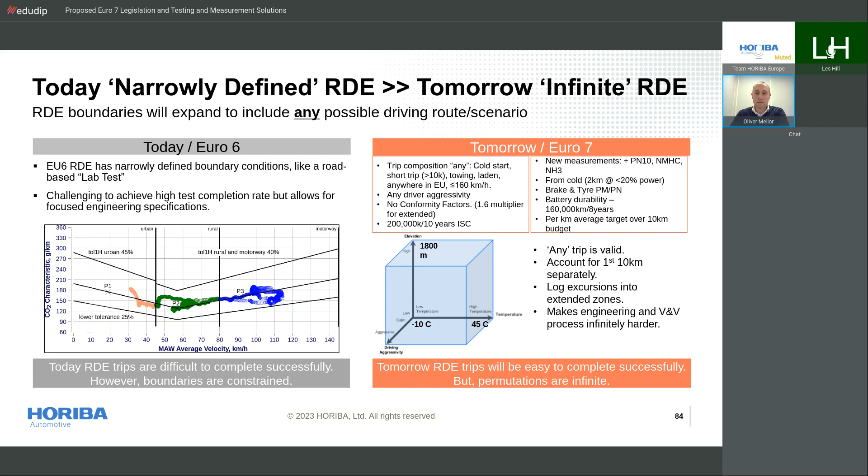If we move on to an illustration of what that could be. So if you imagine a typical test plan, are these red boxes here, and I'll walk you through that. So one powertrain family in one vehicle model at a particular traffic density, very aggressive driving, for example, and then a low state of charge at high altitude. That could be deemed to be the worst case scenario for that vehicle, for that manufacturer. But clearly there are other permutations, so less aggressive driving, less traffic, and so on, and different altitudes, and clearly more than one model and more than one powertrain family. So with just this example here, if you discretize the boundaries, 108 permutations. So that's a lot of testing potentially to do to demonstrate compliance.

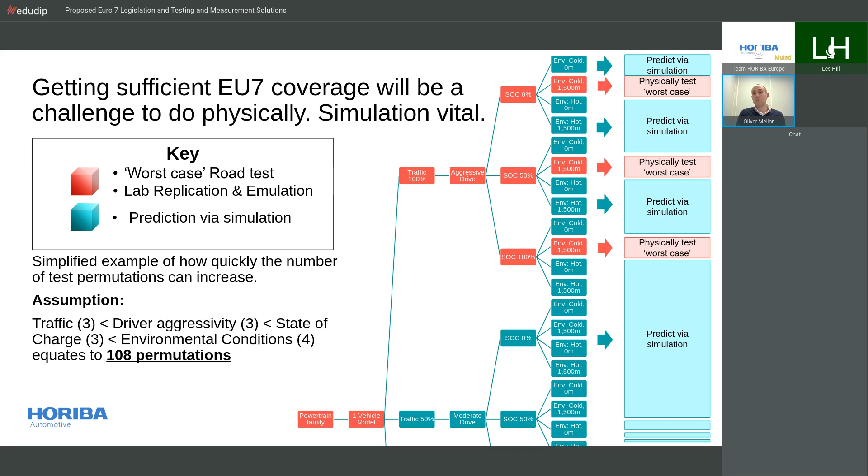So what we're proposing is that customers do the testing that they feel comfortable with, perhaps the same as today, maybe a bit less, maybe a bit more, but fill in the gaps with simulation. And traditionally the challenge with simulation is believing that the simulation is true and giving you good enough data. And we think now we have a solution to bridge that gap in trust.

Here's another way of looking at it. The red boxes, which are quite hidden here, could be the traditional test approach, the physical testing, taking vehicles to cold climates, high altitudes, hot climates, and the traditional test plan, but then filling in the gaps in between with simulation and covering the entire box. So this would be the extended EU boundaries.

And one of the things that we think is compelling about this approach is it gives the ability not only to cover all the possible permutations and scenarios, but it can also highlight areas of concern. So an area which may never have been tested could flag through simulation, and therefore can be caught before the vehicle is released to sale. And I think this is particularly interesting for the legal teams within OEMs. They want to feel confident. They want to feel that there's a managed risk when these vehicles go to market.

So how we propose that it can be done, it's essentially using existing test labs with a few upgrades. Step one would be to do the road testing as normal, hopefully with HORIBA's Euro 7 PEMS equipment, recording the pedal positions, recording the vehicle speed and outputs from the PEMS equipment as well. And then we have a piece of software which translates that information into a test cycle, which we call torque matching.

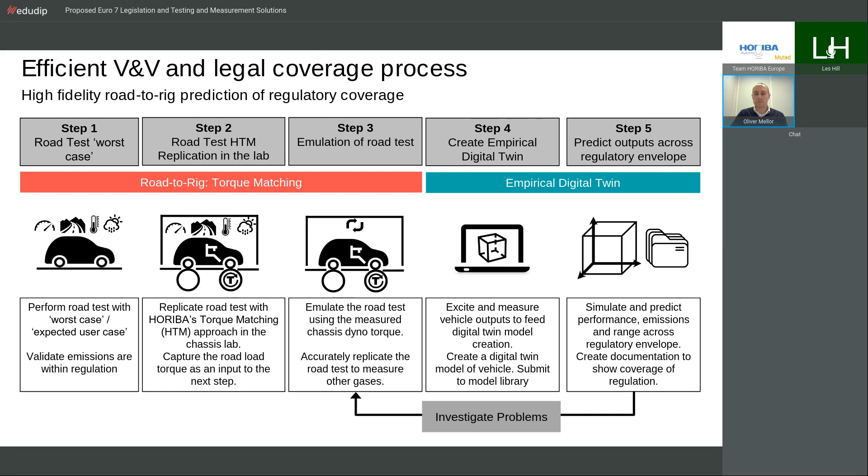So this is a copy of the slide that Les showed from the Intelligent Lab chassis dyno setup. So essentially we're saying, do your road testing as normal and then replicate on the dyno. So we're replicating a real world cycle, but we've got the benefit of using laboratory grade measurement equipment, the ERLAM technology that Les talked about before, and we've got the ability to do it repeatedly. So it's stimulating the ECU exactly as it experienced on the road. So that's what makes it different from an RLS road load simulation approach, for example.

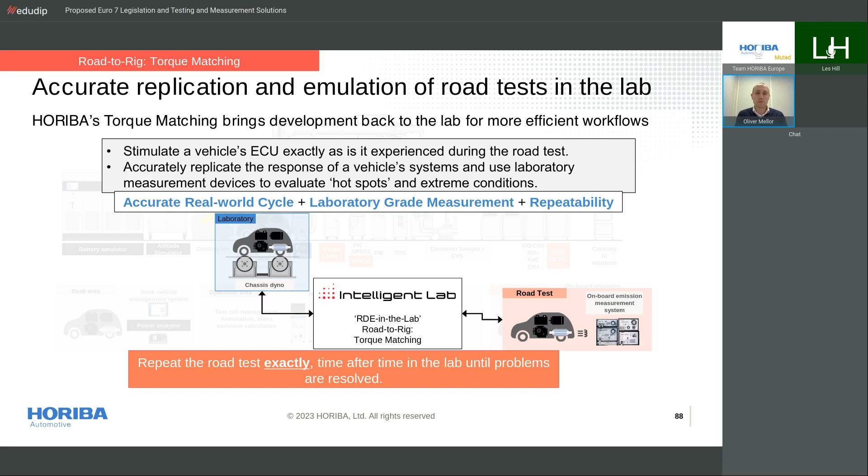Clearly, the robot is more accurate than a human driver could be, and this then has benefits in terms of accurately replicating, generating the same loads, and ultimately very, very close correlation for emissions, battery usage, energy usage in general. That's a little bit about torque matching. And then empirical digital twin.

Similarly, we've done it on a chassis dyno. Effectively, in this case, the vehicle acts as a powertrain test stand, and we operate the chassis dyno as if it was an engine dyno, in effect. So we design the test to make sure we've captured the entire operating range of the powertrain. We ask the test automation system to perform this kind of strange testing. It generates a lot of data. The data then gets compiled by our software into this powertrain app, and then whichever software your engineers prefer to use, they can use that and explore different scenarios. And again, create this data pack of very trustworthy simulation data.

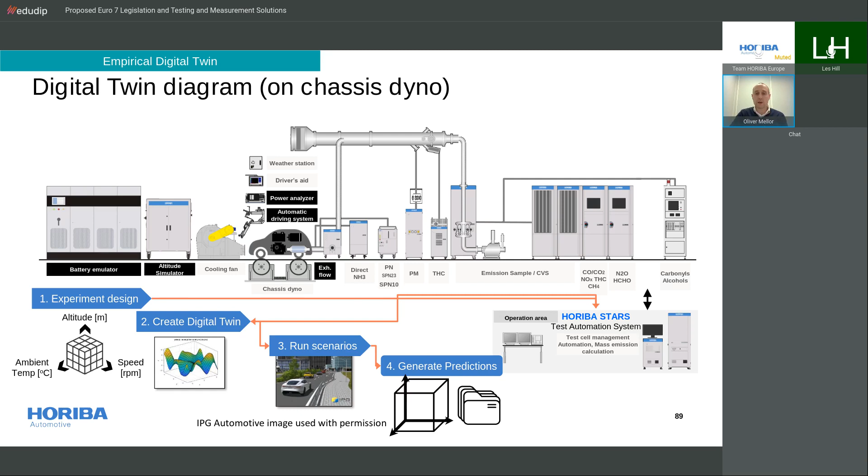So this then opens up the potential. We're currently focused on creating digital twins of ICE engines, batteries. We're also looking at fuel cells as well, but there is the potential for other complex nonlinear systems, such as thermal systems and sensors as well. So once you have these digital twins, these accurate empirical digital twins, you can use them across different models, in different scenarios, different variants, and different departments.

So ADAS teams can use a powertrain model to help improve the accuracy of their ADAS prediction, and likewise ride and handling, and maybe a torque vectoring team could look at the performance of the powertrain early stages to improve their accuracy. And once we have that, then we can highlight these areas of concern and immediately jump on fixing that, whether it's a calibration change or there's a change that's needed in the after treatment system.

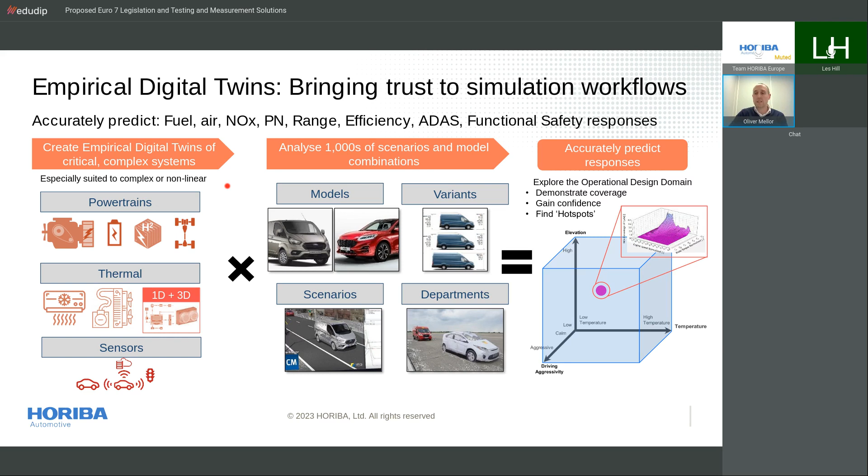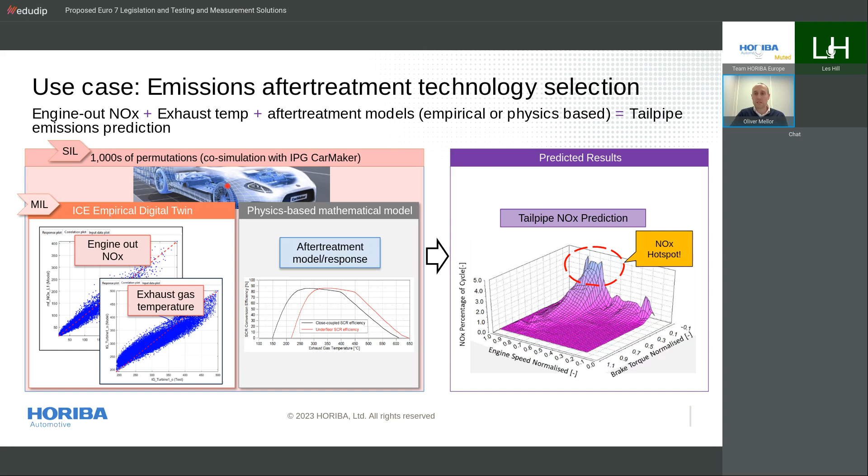And here's just a quick example. We have some engine out temperature and NOx information. We actually combined it with a physics-based model, a basic model, ran it in IPG CarMaker, and we highlighted for a customer a tailpipe NOx issue, which they were then able to fix. So we would be very happy to talk to you about how you can get this capability in-house. And clearly, we think there's a huge benefit here.

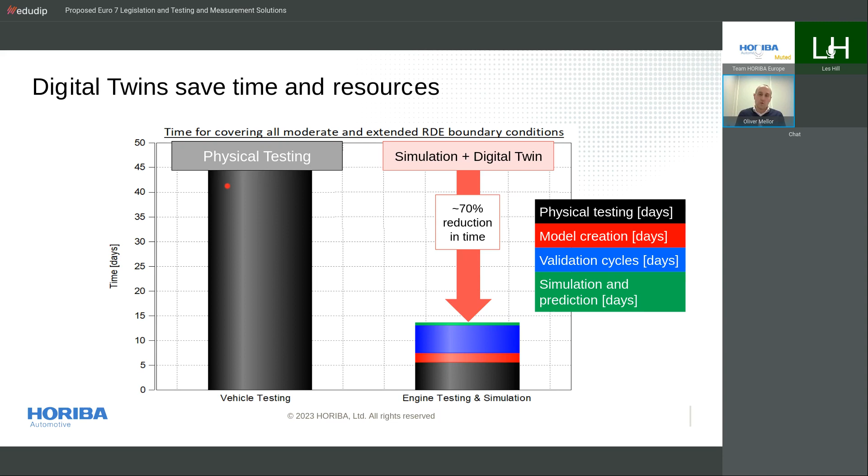So for a typical RDE program, we've estimated sort of 45 days of RDE testing, and we think there's huge potential to cut down the number of tests, the number of trips, expensive trips to hot climates and altitude areas, for example. And what you have then is a mixture of some physical testing and some validation and model creation. So the test teams work in partnership with the simulation teams. And that's everything from me.

So let's have another survey. So what do you need from suppliers like ourselves? We're asking you an open question, really. Feel free to email us anything that's missing off here. But we've put a quick list of some of the major challenges that we think we should be helping you with. But clearly, tell us if we need to do something different. And we'll just let this run for a few minutes to get the responses.

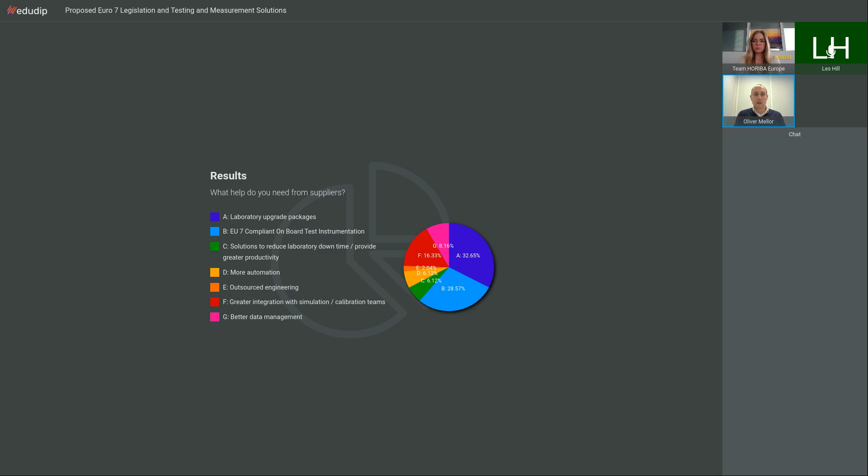Okay, that's interesting. It's similar to the results we got this morning, where laboratory upgrade packages and onboard testing were popular. And I think in this session, the greater integration with simulation is slightly more popular than last time. Okay, thank you very much.